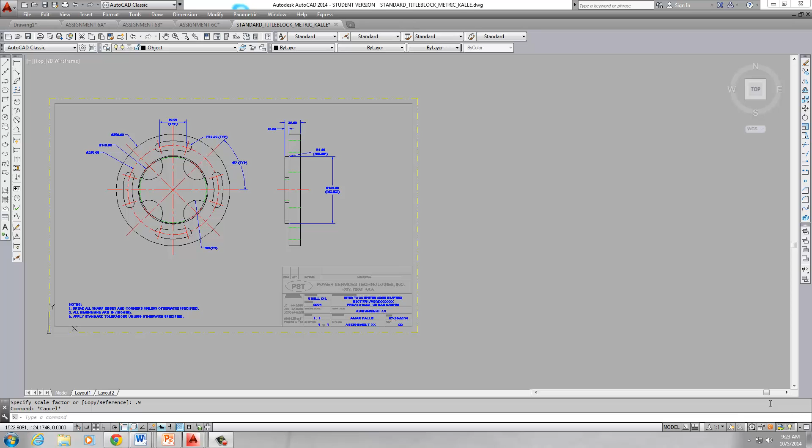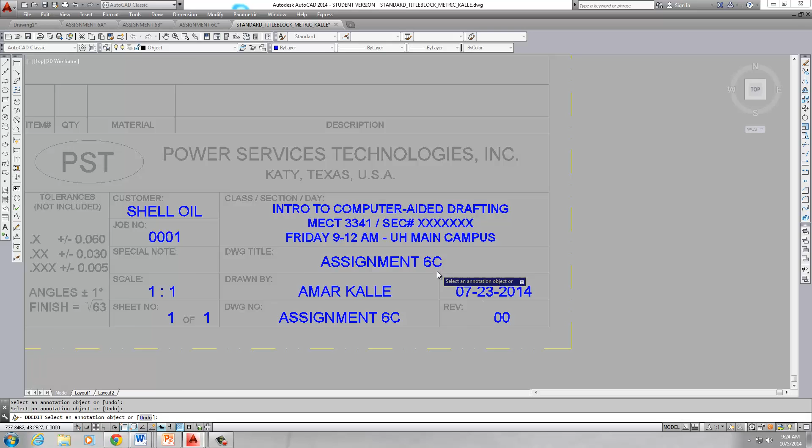Here's assignment 6C. I don't have it labeled right now. I just wanted to show you guys when you open up your standard border that I helped you do, basically all you're doing is this pretty much. All right. So there we go, and of course the date. Change the date whenever you want to, and to whatever date that is. And okay, so there's our drawing.

So let's start building this one up. If you notice, when you look at it, it's all a bunch of circles, right? All circles. Everything's all based on circles. So let's do that. And we'll talk about this little relief here in a minute. That's basically this little channel you see going all the way around.

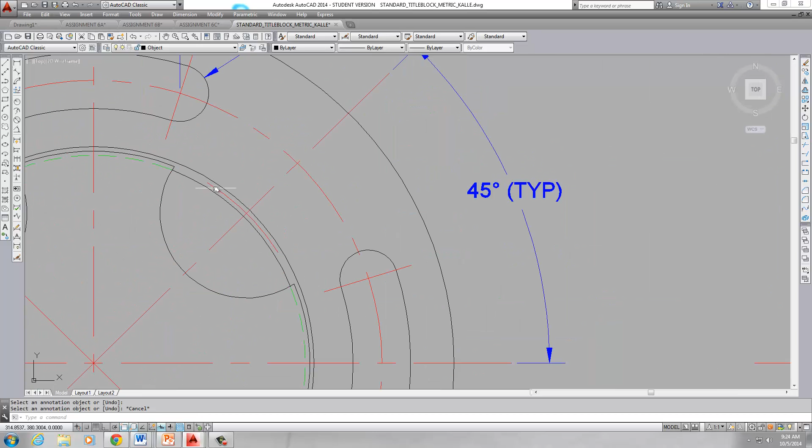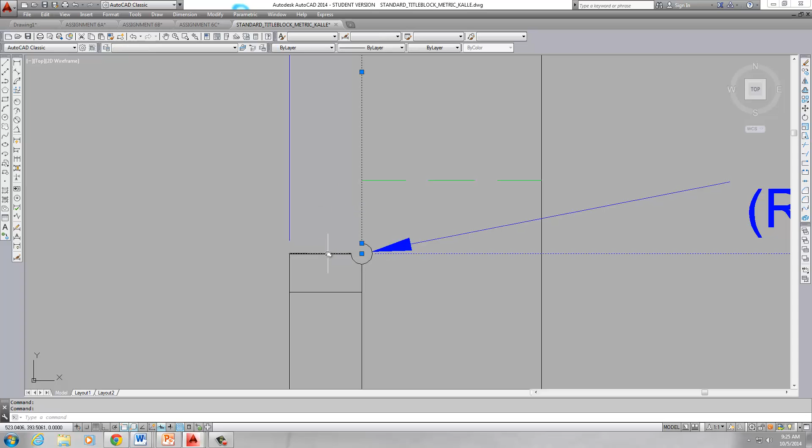The center of that relief is that center right there, which happens to be what? 150 in diameter. Okay, and that happens to be shown right there as well. That shows you it's the center of that relief. Okay, that relief is so that things can mate directly on this face and directly on this face. And essentially, I'll draw you something and show you how it works.

So just say there's a part that's going to come in and fit in this corner. So I'm going to move this, and I'm going to be free-handed. I'm going to show you what happens when a part comes in here to fit. What happens? It hits the back wall back there on the right, and it comes down and touches this wall here. Well, guess what? It'll hit nicely on that wall. It'll hit nicely in the bottom wall, and I'm good to go.

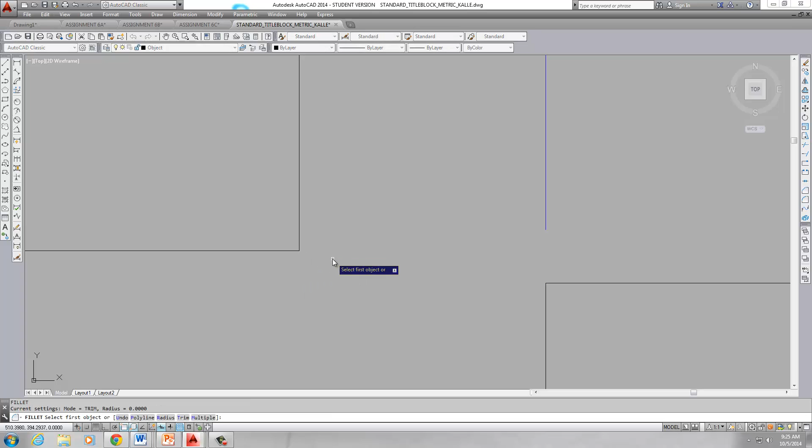Everything's all good. So what does a relief do for me? It takes care of this corner right here for me. Because this corner could be sharp. It could have a fillet like this. But if it had a fillet like this, it'd be no problem fitting in this corner. But usually, they don't have fillets like this. They can have a fillet probably like this. Alright, so there's your fillet. Now, if I had a sharp point in there, this still would be okay.

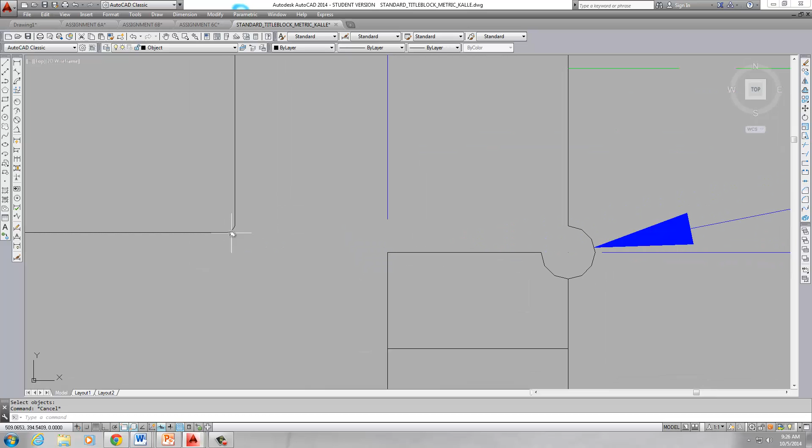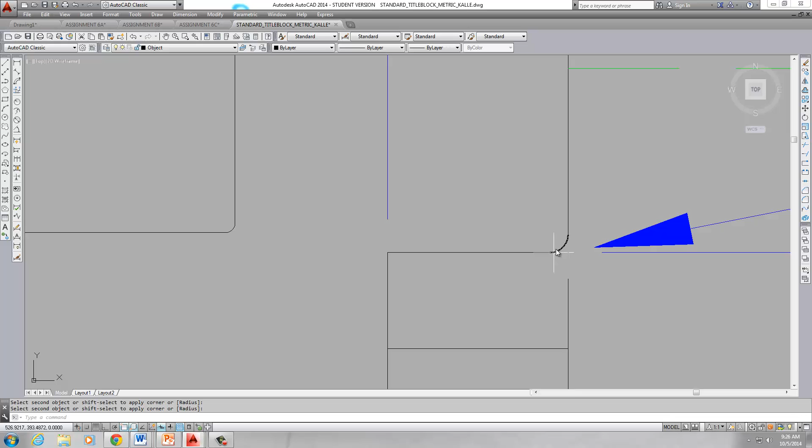But to avoid any problems with this corner, now you have to remember, if this relief was not here, what would we have here? We'd have a fillet probably around this, which was, say, 1 at the most. So we go here to here, and there we go. So now that's the fillet the part will have, because parts can't have inside a sharp corner, right? Can't do it. It's not possible. You have to have some kind of a radius in there.

Well, now let's say I didn't have that relief in there, and you see parts that have radiuses. Oh yeah, they're radiuses, no big deal, it'll fit. Well, let's move this back in there again and see if it'll work. If I go straight into the back wall and I go straight down, what's happening? My part cannot go in past this spot. That's because there is no relief to handle this corner, the differences between the two corners.

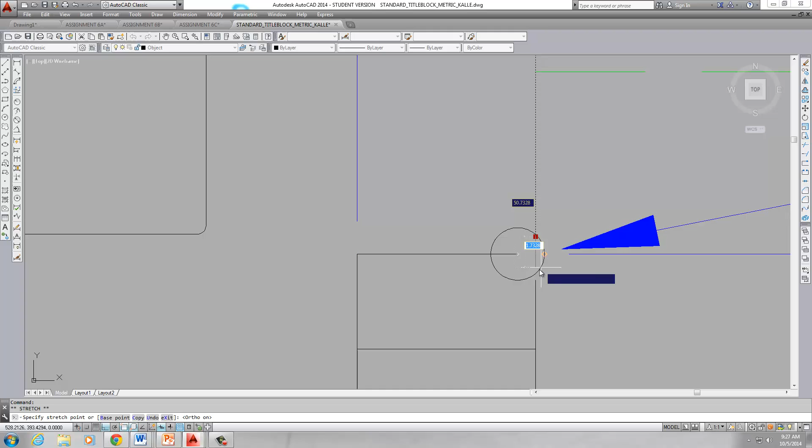So what we do is we put that relief that you saw I had in there, the circle I'm showing you here. And that was a radius of 1.5. So I'm just going to move it over to be where it needs to be in the middle. Let's make this line go down because I got rid of it. I lost my position. Let's go perpendicular.

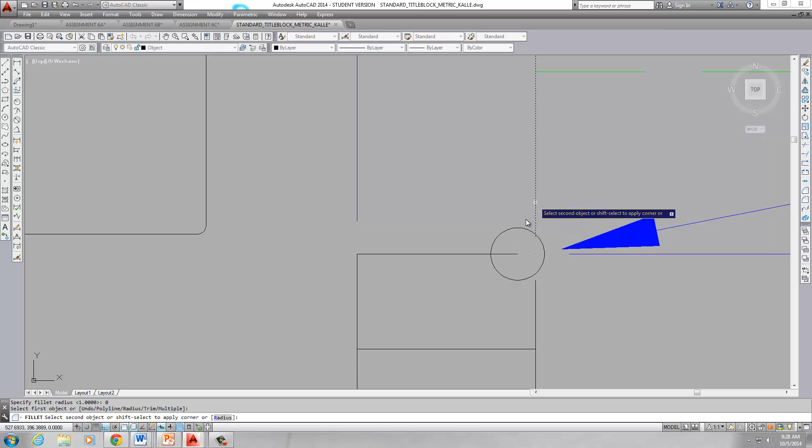Oh, you know what? Just fillet it. Radius 0. And I'll bring these two corners back together, and then move this piece from the center of it straight to this corner, and that's the center of this. And then basically trim these two things out, and there's my relief. Okay, so that relief allows me to move this piece, and guess what?

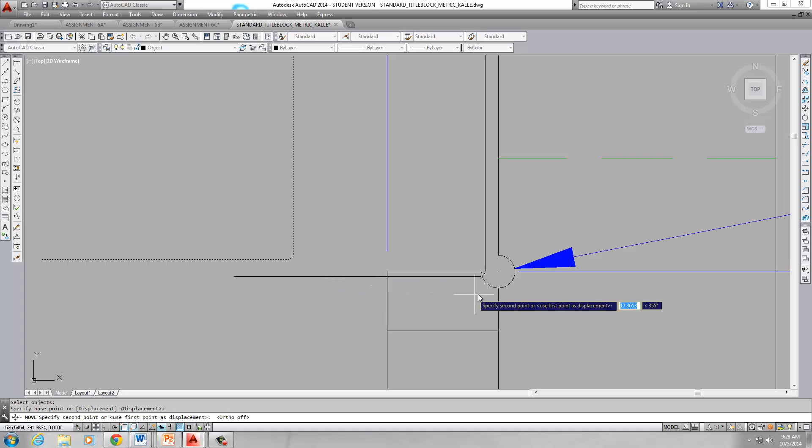It fits nicely. Don't have to worry about that corner at all. I know that it'll fit no matter what I do. Okay, that is the purpose of a corner relief. In this case, it's the relief in the bottom there. All right. Just want to show you what that was so you understand.